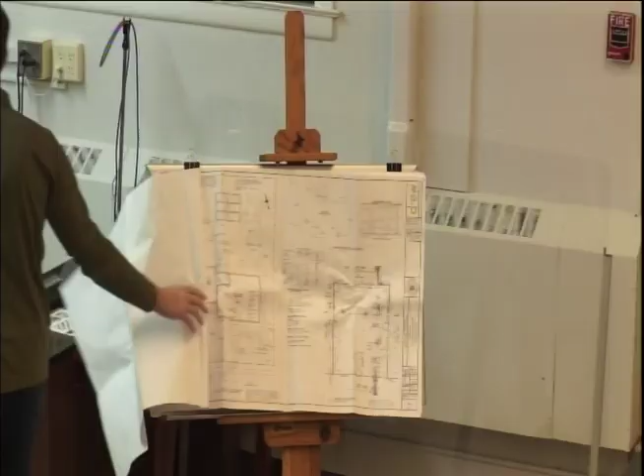Good evening, everybody. Sorry, couldn't be here at the last meeting. My name is Andrew Collingham. I'm the architect for 77 Alcamont. This is my associate here, Alex Glass.

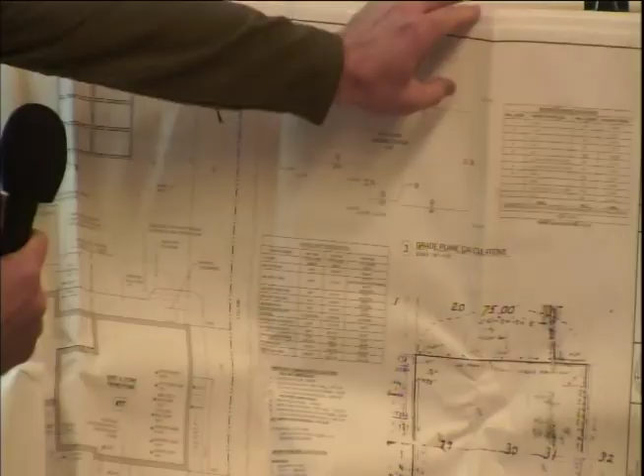So this is a single-family property that's undergoing a substantial renovation and an addition. Currently, the house is in serious disrepair, and so the owner, my client, Anthony Gizzo, and his team are going to be renovating it. So the concept behind the project is to demolish a portion of the house. If you look here at this existing plan, in the basement there's currently a single car garage that we're going to be demolishing, and the addition is going to be situated on the left side of the property, because that's where we have more room. If you see on this existing survey here, the house is closer, favoring the right side property line, so we're going to utilize this current left side yard for the addition.

The addition is comprised of a two-car garage in the basement, above that is going to be a family room, and above the family room is going to be a master suite addition. So in terms of the materials and the aesthetics, the architecture is...

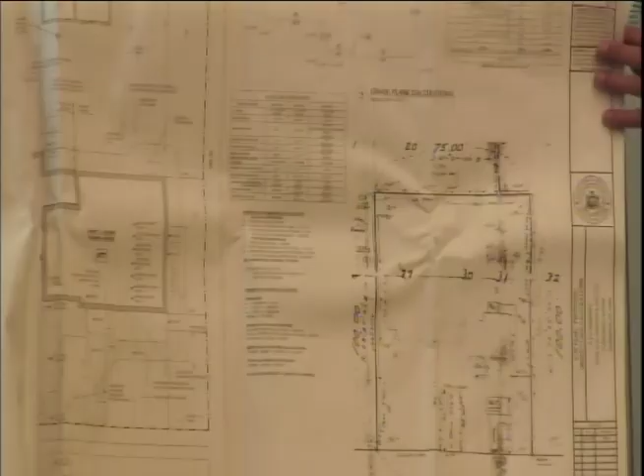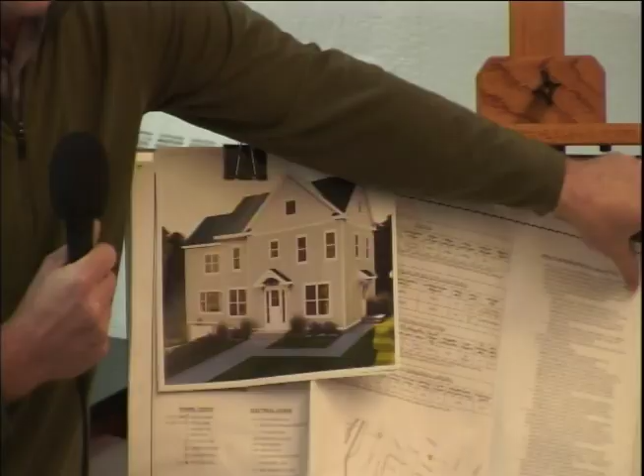More in line with a center hall colonial style, something that's fitting for the neighborhood. The colors are sort of neutral and muted colors that aren't too loud or are more fitting in line with the neighborhood.

So in terms of the materials, we're going with a Hardie product combination, mixing and matching some lap siding on the first and second floor, and then at the attic level we're going to go with a Hardie shake panel siding. Both are fiber cement siding products that are low maintenance, easy to cut, easy to maintain, and they look attractive, just like wood. For the trim, that product is going to be a PVC Azek trim at the corner boards, the skirt board, the frieze boards, and all the soffits and fascias, as well as the window and door casings. Again, low maintenance and a good choice for exterior trim.

The roofing is going to be Timberline HD asphalt architectural shingle in the charcoal color. And then I believe last time we were missing some of the selections for the hardscaping, such as the patios and the retaining wall. The retaining wall is going to be a concrete interlocking block product.

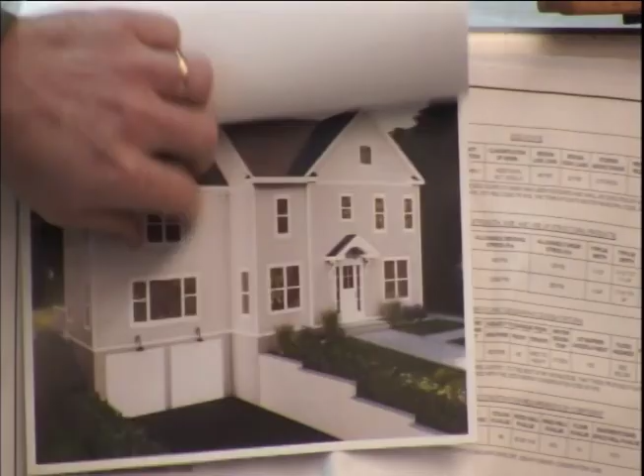Kind of difficult to see here, but there was also a question last time about the grading around the property as it pertains to the heights of the retaining wall. So on the right side of the driveway here, we're going with the 6-foot maximum retaining wall that fits the grade, and it suits the elevation of the garage and the entrance from the driveway. And then on the left side of the driveway, as it pertains to the grade, it's about a 4-foot high retaining wall.

And then both of these walls slope down to about 0 when they get to the street level. So these retaining walls are necessary to play into the topography of the existing grades so that we can maintain access to the garage at the basement level. The current situation is the same concept, but we are shifting the garage over to make up this new addition. So it's the same concept.

The driveway has a slight pitch towards the garage doors, where we have a trench drain in front of the garage doors to catch stormwater. And then on the front yard here, we have a walkway, concrete paver walkway, Unilock product. It's sort of a muted gray color, very neutral. That walkway wraps around to the side yard where there's an entrance into the mudroom at the side here.

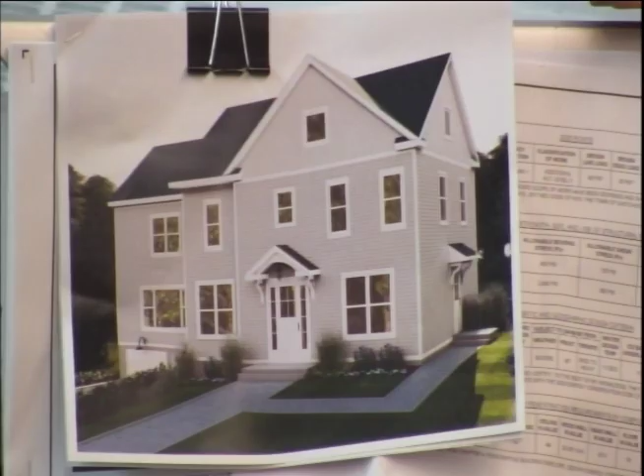One of the comments we received was pertaining to guardrails or railings around the retaining wall and at the front door. Both of those conditions are not a code requirement because there's not a walking surface adjacent to a 30-inch or more drop. So at the front door here, we only have 2 risers, which is roughly 1 foot, so by code, we don't need a guardrail or handrailing because it's less than 4 risers. The same condition exists for the side yard. For the driveway, even though we have a 6-foot retaining wall, there's not a walking surface within 36 inches of that retaining wall, so by code it's not a requirement to have a guardrailing there.

So that was kind of a lot. I don't know if anybody has any specific questions on our amended set.

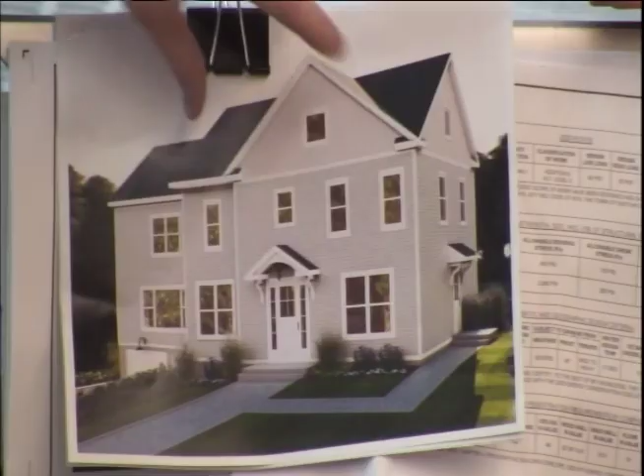The existing home that's existing? Correct, yeah, a portion of it. So, do you have photos of the existing home? We submitted it on the original submission. I don't have any with me. I don't know if you can pull any up on your phone.

Because I know you're saying that the left side is an addition, but what's happening to the right side? I wasn't at the last meeting. Oh, okay, because it looks like the whole house is new to me. Yeah, correct. So we're taking the entire second floor down, the roof, as well as the second floor walls, and then keeping the first floor walls, and then we're just repurposing them, including them in the new design.

So one of the questions we had last time was, I guess, the home on the right side, the existing home, on A3, there was kind of just some confusion regarding the extent of the existing foundation versus the new foundation.

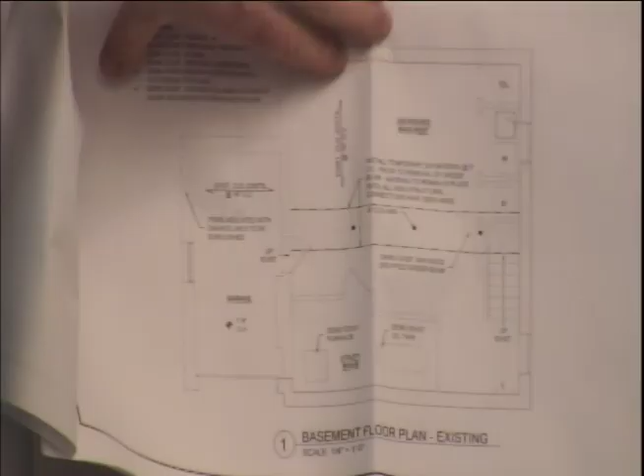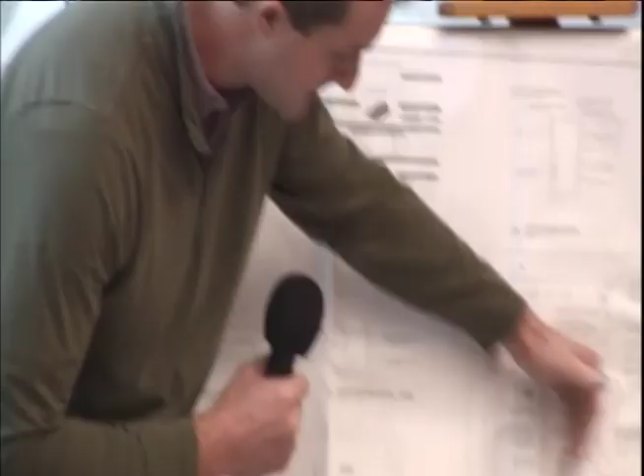Sure, if you look at this existing basement floor plan, you can see that the existing garage is on the left side of the house. So what we are doing is effectively building where this garage is, so that's getting removed. And the new garage is going to go right next to it, 2-car wide. So if you look here on this plan, this dark delineation line shows the difference between existing on this right side and proposed on the left side. Right. So this is the extension here, but this is all new foundation that wraps around here.

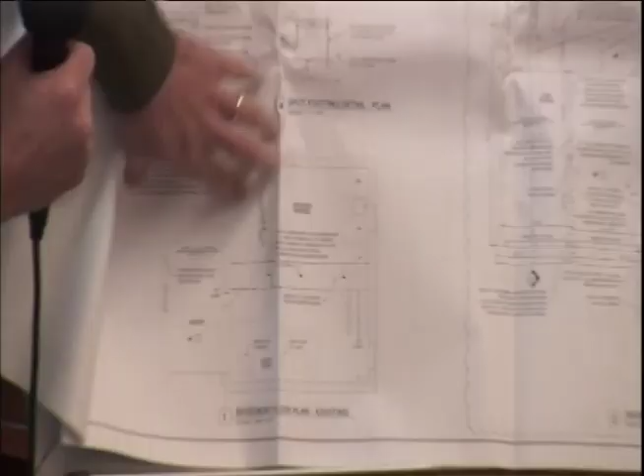All new foundation just on the left side, to the left side of that dark line, correct. So everything on the right side, it's just existing poured concrete foundation wall to remain? Correct. Before, so you're just pinning the new, are you saw cutting it? Well, it starts where the existing garage door is. So the garage door is going to go, obviously, and then this is all going to get removed here. And then, yes, we're going to cut where this dash line starts, which is right about here, and that's going to get removed.

And the existing foundation is poured concrete? Correct. How old is the house? Existing house? I'm not sure of the exact date, probably in the 50s. It looks it, looks older than that. And it's poured concrete? Yep.

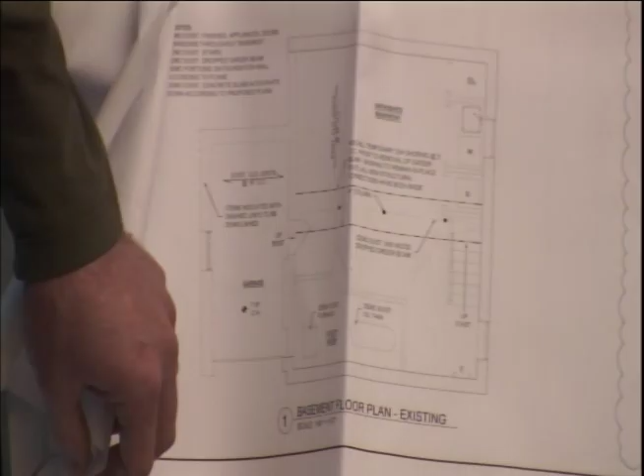So the existing house, yeah, the garage, the existing footprint of the existing house is not getting enlarged, only the new? Yeah, it is getting enlarged. It is getting enlarged? Yeah. So you're contradicting yourself then. Well, no, it's an addition to the project. I know there's an addition to the left. I'm talking about the existing house. You're taking off the second level and building a new level? Correct. Because scale-wise, the house is another 12 feet higher than this house. Correct. So that means it's probably getting deeper as well.

So there's a rear foundation, or no? Say that again? Is there a new foundation behind the existing house? No, it's actually getting smaller behind it. If you go to this first floor plan, you can see.

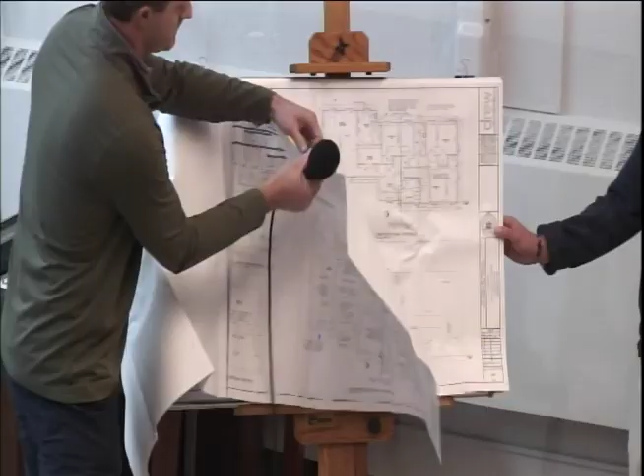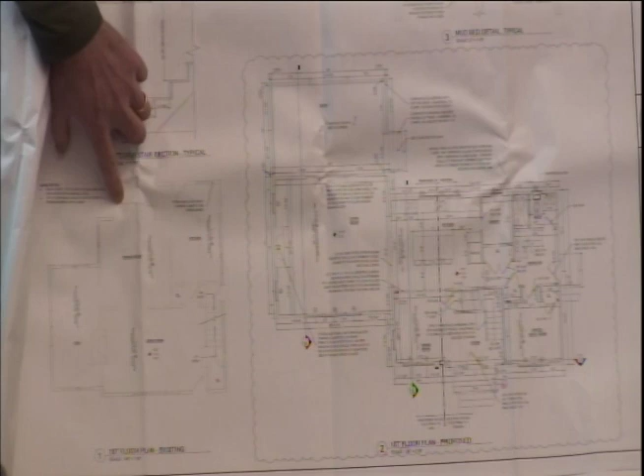So this is the current existing first floor plan. As Anthony had mentioned, this den area on the side, which is above the garage, was an addition at some point. So the existing house is really this square shape here. There's two very shoddy additions in the back here that are not on foundation. They are just cantilevered, sort of hanging in the air, so those have to come down. So effectively, this square right here is the existing house that is being preserved, and this piece here is the addition.

I think what would be helpful is just a rudimentary, almost block diagram that clearly indicates the footprint of the existing home, and maybe the subtraction of those cantilevered portions you're talking about, which are structural elements without a foundation. Then just in cross-hatching indicating the new addition, so it's very clear but in a simplistic form. That's kind of the conundrum we had last time, it was difficult to see, because the garage is being demolished.

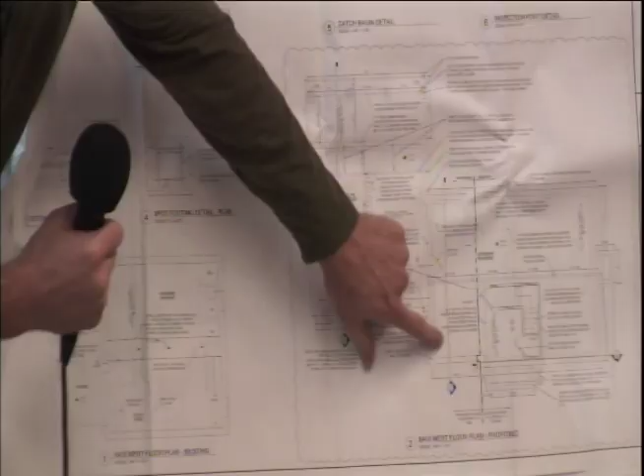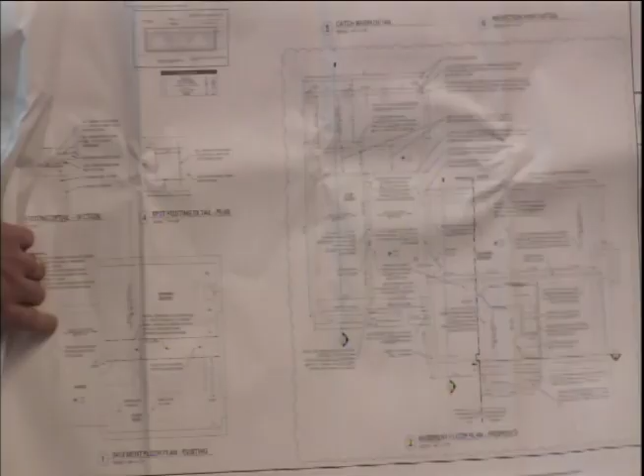Even though this part here we're showing as new, when we're constructing this it will be new. But in terms of existing versus proposed, this section is quote-unquote existing, but it needs to be removed in order to properly construct the new foundations for the new house we're building. So it's new foundations on everything? Not everything - if you look at the existing basement, this garage is existing, but it needs to be completely demolished in order to be conducive with the new project. So this rectangle here that's maybe 10 by 20 is existing in shape, which is right here, but in terms of what we're calling new construction, this needs to be newly constructed.

From a diagrammatic perspective, I understand what you're saying with the overlay and hatching, to understand it, but these are more construction drawings, and how would that work? I'm not saying that, but everything to the right of the hatch line - I'm looking at the old drawing just for reference - you've made some clear additions, i.e. the existing on the left, or the new on the left and the existing on the right. But the foundation to the right of the dotted line...

This one, that's an existing foundation. Correct, this whole area is existing to remain. And I think to my colleague's point, that footprint is remaining, correct. You're not extending it out the back, you're just increasing it in height.

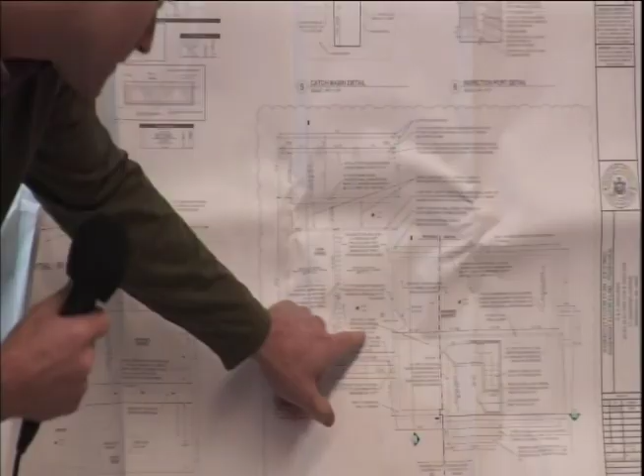Correct. Are you changing the posts and footings supporting the beam in the basement too? Correct, the existing slab, yep. Okay, because the columns in the existing don't match the locations of the columns in the new, so you need to specify that those 3 footings are all brand new also. There's a note on one of them, but it's not clear that the other 2 are also new. Yeah, there's a note here, 2 foot by 2 foot spot footing, but the other 2 would be typical. I think it just needs to be clarified what exactly is new versus what's existing and staying.

Sure. So you said it's going to be HardiePlank, right? HardiePlank, yep, and the windows are new? Correct, yep. What kind of windows, what kind of grills? As you've shown, no grills? Yeah, as shown on here.

I'm just thinking, my personal opinion - the house reads very tall, and I think it needs more detail, like grill work, because it's reading a little flat. Also, even though you don't need a railing at the front door, I think it should have a railing for aesthetics, not for code. Yeah, I don't know, I think it would be a little funny to have a railing with just a 1 foot high platform off the ground.

You said it's 2 steps, right? Yeah, 6 and 6, roughly.

I think if you did some kind of grill work, it'll make the house look a lot nicer, and maybe a horizontal element between the first and second level, which will make it read less tall. Believe me, I would love to make a highly articulated piece of architecture, but there comes a point as a homeowner where you ask, is this project worth endeavoring on all these finer details and expensive elements?

But that's the reason why we're here, as a board. I think there's a happy middle ground that we can come to, and it's also worth keeping in mind what is currently there and how we're improving that underlying existing condition, trying to not only improve this particular house but also the whole neighborhood. How does that current structure weigh on the surrounding neighborhood currently?

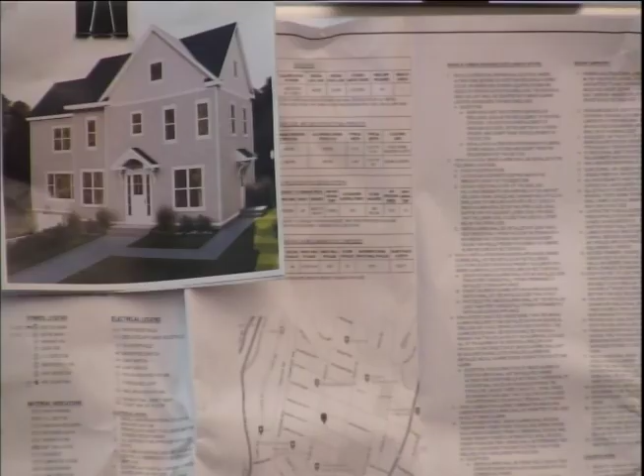The windows on the first floor - how tall are those windows? 6 foot? I'm not sure off the top of my head. 5'6".

So how tall are the second floor windows then? They look out of scale - they look much bigger than the second floor windows. 4'9" on the second floor.

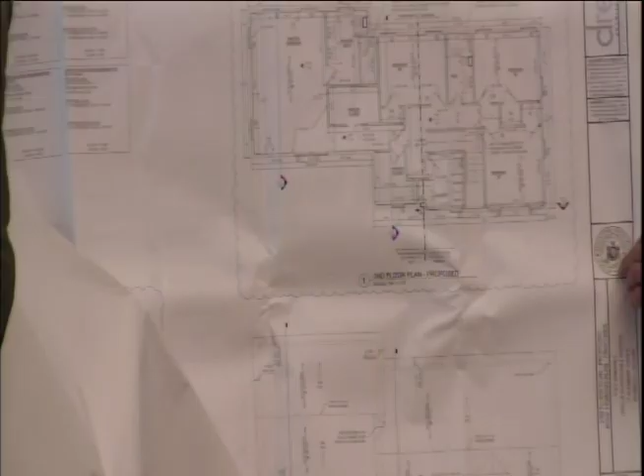Sylvia, if there was some sort of a dividing horizontal line, would it come into the portico in a weird place, or? Well, it's the architect's decision where he wants to lay it. He probably would want to line it up to the bottom of the portico, so it lines up with that line. Okay, but would that be too close to the windows, or no?

The lower windows? Again, it depends on where the head of the windows are, and also the portico could be raised. I'm just suggesting, because just by drawing that horizontal line, look at the house - see how it reads? It reads very tall.

Noel, we had a list from the last meeting, and how much of that list have we discussed? So let's just go through the list. It said to provide accurate grading, particularly near the driveway.

Provide an elevation of the retaining wall. Clarify the proposed finishes, specifically whether the scallop siding is proposed. Provide the specifications for the railing at the top of the wall and the stairway - we've discussed that to some extent. Clarify the walkway and steps on the side of the addition.

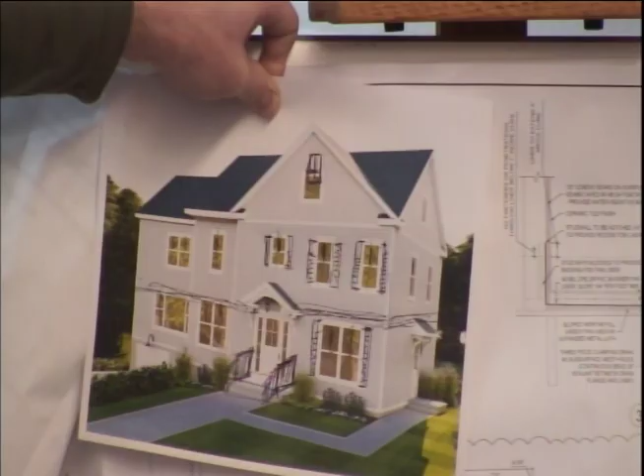Is that the safest solution, as the design professional, is that something you'd start out with - just having the top of that retaining wall flush with the grade? It looks nice in the rendering, and you've stated that because it's not adjacent to a walkway, you don't need a railing on that wall. But again, the rendering, it's not going to look like this right out of the box.

You know, the renderings and the plantings have to grow. And I just think from a safety standpoint, this wall would feel safer if it projected above the grade. You're saying the grass is flush to the top of the wall?

Well, it's not the grass, it's the mulch bed, the planting bed there. But to the corners, right? Yeah, the stone would be proud of the mulch bed because you don't want runoff, dirt and soil going over the wall, so there's gonna be some barrier there - it does project above it.

When I say flush, I mean visually flush, but there's gonna be some proudness of the wall over the mulch bed. I don't think it should extend more than 2 or 3 inches, but there's some negotiation between the slope of the soil and the stepping of the stone. So it varies, but it shouldn't be blocking a person from falling over - that's not the purpose of this wall.

I understand that, but as long as it's not flush - for maintenance and runoff, but I also think from a safety standpoint it shouldn't be flush, because it's not gonna be grown in right from day one. I don't know, are these homeowners your clients, is this where they're gonna live, or is this a spec house?

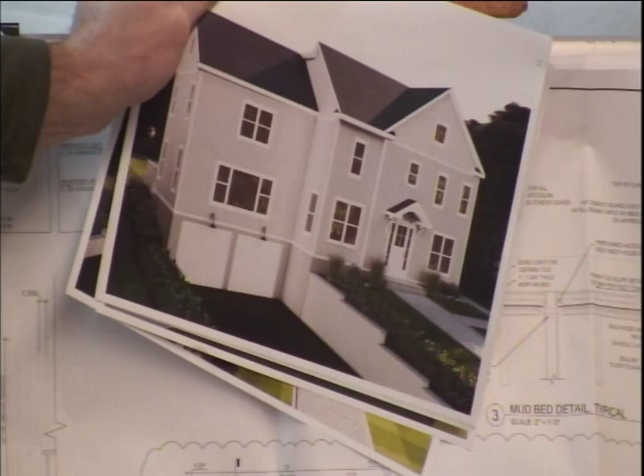Yeah, it's an investment property. Okay, so there's a possibility there's gonna be young kids there playing in the front yard. I think you just need a degree of buffer, that's why we added the plantings there - a 3-foot buffer, that's why you added them in the picture. Yeah, I would say definitely put some plants.

Is this AC in the back here?

I think a railing there would look unattractive because you have a 4 or 5-foot wall plus a 3-foot railing. I'm just asking if you would increase the height of the wall, so it's like a curb - not 2 inches, it could be 6 inches, all you're doing is increasing the wall by 6 inches so that it's got some kind of a barrier.

It's more of a visual thing - you're just not going to kick a ball right off the side, or run over. Fine, okay, I got you. Essentially a reveal, like a reveal on a curb. You're just creating a curb at the top of the wall from where the grade runs in.

Is the public hearing still open on this? I think it is, yes. Okay, so is there anyone here that would like to question or comment on this application? No? Okay, so then close the public hearing.

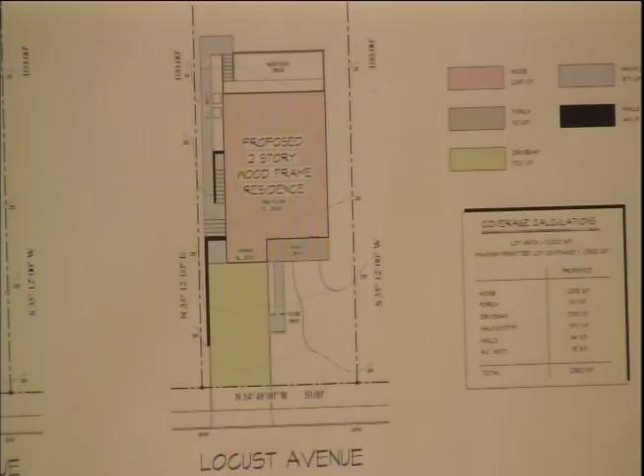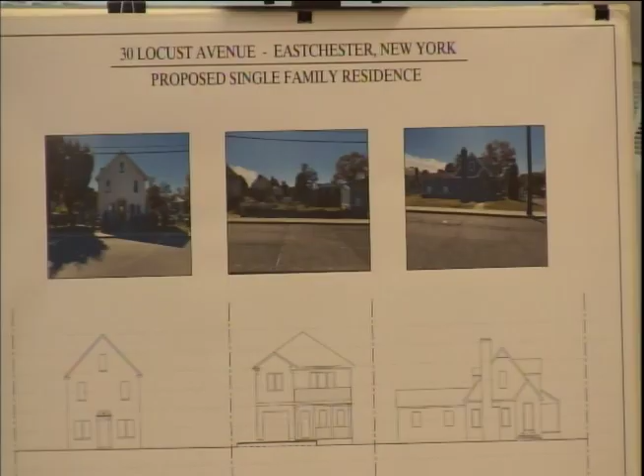This is a street facade drawing showing the relationship to the neighboring homes. So this is the proposed home on the vacant lot - a two-story residence. To the left is an existing two-story residence with a detached garage further back in the rear yard. And on the right is a 1.5-story residence, showing the relationship. These two houses will be approximately the same height, and the one on the corner is slightly lower. Locust Avenue slopes down from left to right - it's a very gradual, slight slope, nothing too major. And then the subject property actually drops 4 feet in height from the street to the rear property line.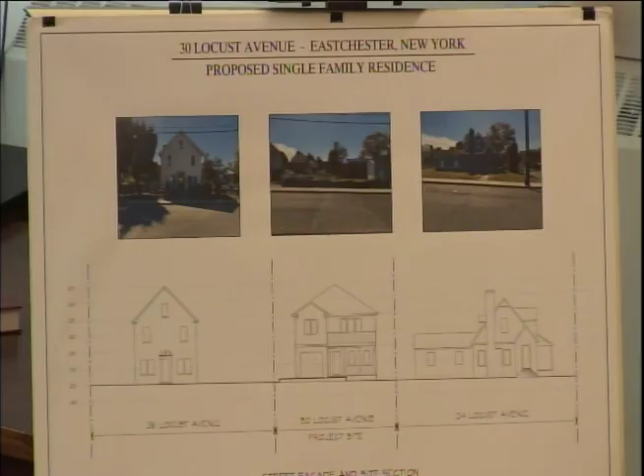Here's the exterior elevations. On the front, we have the garage overhead door at the left, and then at the right, we're going to have porches both on the first floor and on the second floor. On the sides, we have the second floor cantilevering into the rear yard in order to create a little more space for the depth of the wood deck. So the wood deck is at its maximum setback here - we set the first floor in a little bit just to get that 10 feet of deck space. And then at the rear, we have the wood deck with the metal railing and some lattice below.

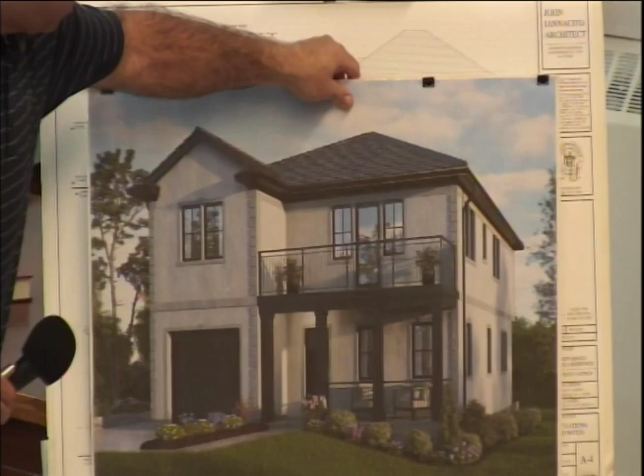This is the rendering showing the finished materials. The wall surfaces are going to be a stucco in a light gray finish. The quoins on the corners, the casings around the windows, and the banding around the building are all going to be a stucco also, but in a slightly darker shade of gray. The windows will be vinyl clad in a black finish.

The roof surfaces will be a concrete tile in a dark gray finish. The trim boards and the columns will be AZEK painted black. The railings are going to be metal in a black finish. The gutters and leaders will be aluminum in a black finish. The front entrance door and the overhead door will be fiberglass in a black finish.

And I have samples of all the materials that I can pass around.

And then this is the landscape plan, which was produced by Dan Sherman. We have a couple of new trees, one at the right corner of the property and one adjacent to the deck to provide some screening to the neighbor. We also have a row of plantings along the driveway between the driveway and the neighboring property, a row of plantings between the driveway and walkway, plantings along the foundation of the front porch, and rows of arborvitae around the rear property lines to provide screening to the neighbors' properties.

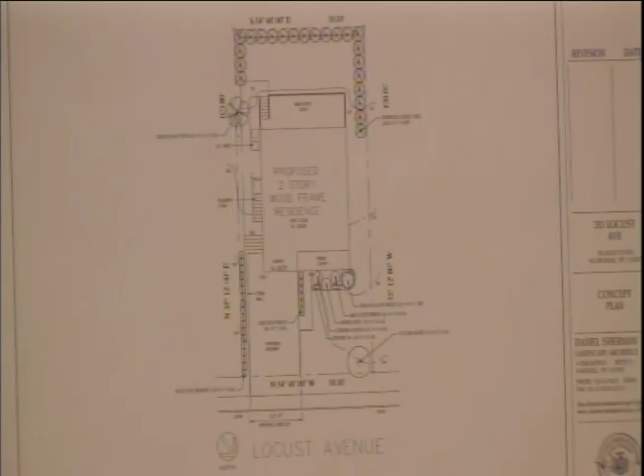The lights are shown on the elevation, and I did submit a cut sheet of the lighting fixture, and those will be similar at every location. And that's about it. Thank you for your time, and I'm happy to answer any questions.

That's the roof. Is this 2 lots in one? So they're 2 25-foot lots. For some reason, they show up on the tax map as two separate lots. They're actually subdivided lots and they're going to need to be merged.

Oh, we have to merge them? Yeah, because they're lots shown on a filed map, not just tax lots. Okay, we could talk about that tomorrow, that's not really for this board. So is that why it's got like the double barrel, we had to put two numbers, 30 and 32? Yeah, because on the tax map it comes up as two separate lots.

Right, okay, excuse me, this is the color as well, right? That's the color. And that's the stucco of the wall surfaces, and then the quoins and the trim are gonna be slightly darker than that. This is AZEK, everyone knows AZEK.

Metal railing, and then this will be the overhead doors, but in black, and no glass on it. No glass? On the garage? I want glass, you want glass on the garage? Yeah, I think it would look nicer. Are they gonna be black? The door's gonna be black?

I have a, I guess I'm gonna start as usual. Sure. All right, so this is being built for someone, or it's being sold?

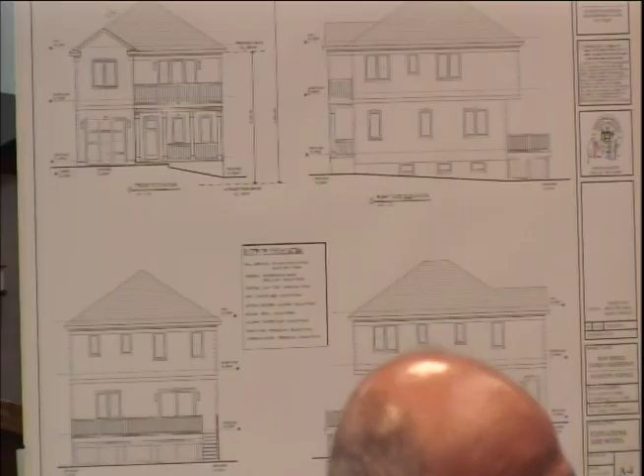Side lights - I think adding side lights to the front door would also give it more of a front door entrance, entryway look. Especially since it's set a little bit back, you kind of need to highlight that it's the front door.

Okay, all great suggestions, but I don't think you need the quoins. It'll make it more bling. No, you don't.

Also, because of the gray color - I mean, I love black windows, I like black - but it's lacking warmth for this style. It's not going, I would say gray is more of a modern look, and the only thing is we're trying to play off that roof.

The whole thing started with the roof. I mean, unless we go with something a little different on it. You could go with this color, you could go taupe, not gray, like an almost creamy gray, cream and gray mixed.

No, we're not talking about the tile. Talking about just the paint of the stucco, the color of the stucco, yeah.

Something a little bit warmer. Okay, yeah, that's easy. Well, everybody loves black, white, and gray houses still. Yeah, it's what's in, I don't know why.

It works for certain styles, like even for colonials, black shutters look good. But for the modern farmhouse kind of look, black and white works too. Yeah, there's something about the dark pillars and everything of the porch that felt kind of heavy at the bottom, and dark.

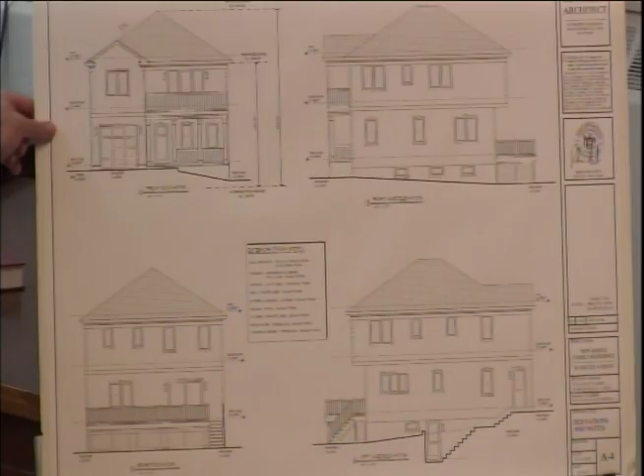And I guess the intention is if you have a balcony there, people are gonna go out on it? I mean, initially, I wanted a roof on that, a metal black roof going across, but you wanted a porch, right, on the front?

I just think it doesn't fit. I agree. So the roof, then, you think the architect, the roof would look better, but it's also not - I have to meet my client's needs. I got you. Well, that's why you're good at your job, John.

But it's almost Mediterranean, so pushing it a little bit more makes it Mediterranean. Pushing it further, then we could actually use the tile on there. I don't know if having a roof here and a roof here might be a bit much, but...

I can take a look. I'm not saying you gotta nix the railing and the whole porch. But I just think that this sort of thing - is it actually gonna be used a lot? It's not even a master bedroom.

I mean, I probably would never sit up there. It's not the master either, it's for the children. Yeah, well, it's a good way in the back for teenagers to escape, yeah, exactly.

Oh, great. But I certainly think the two windows and the door - maybe I can do a double French door, so if it'll fit. But again, it's not the master, so it's like even...

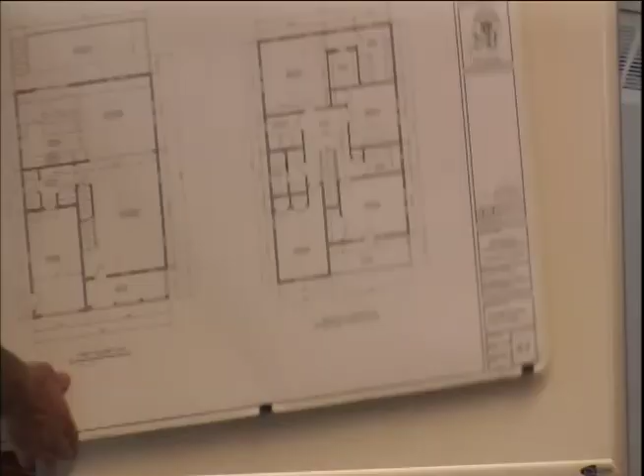Like why, and how do you, for privacy, do you put blinds on that? Just think - yeah, so that's why we couldn't do the three windows.

I think you need to play with it a little bit. I'll talk to my client about it, and if you want - he's just looking to get it built and finish it, move on to the next one.

And we want to make it as attractive as possible, so it sells quickly. We do, absolutely. Yeah, don't we all? Okay.

All right, so is this one open to the public? So I'd like to make a motion to open application 24-41, which is the address 30-32 Locust Avenue, to the public hearing.

Does anyone here wish to comment or question regarding this? If so, please come to the mic and introduce yourself and your address.

Good evening, my name is Marcello Solano. I live at 24 Locust Avenue, the adjacent house to the right. My biggest concern is 24 Locust Avenue has a high water table. And since it was originally one lot before it was subdivided, I believe all my drainage pipe goes into a dry well located on property 30 and 32.

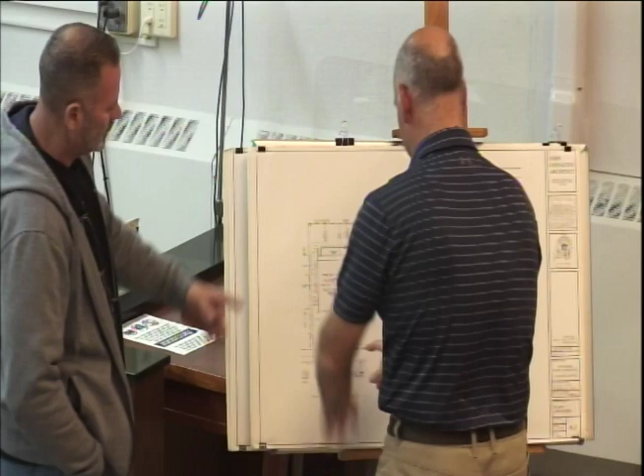Is it for leader drains, or footing drains? No, where's the one with the three pictures? It's gonna be over here in the back corner. In the back corner here? Yeah, where's the one with the three houses?

There's the streetscape elevations. That's really not a plan, you really can't get off of this. Yeah, but it's gonna be back here in the corner. Yeah, so this is the back part, by this white picket fence. Towards the back, you're gonna see it underneath.

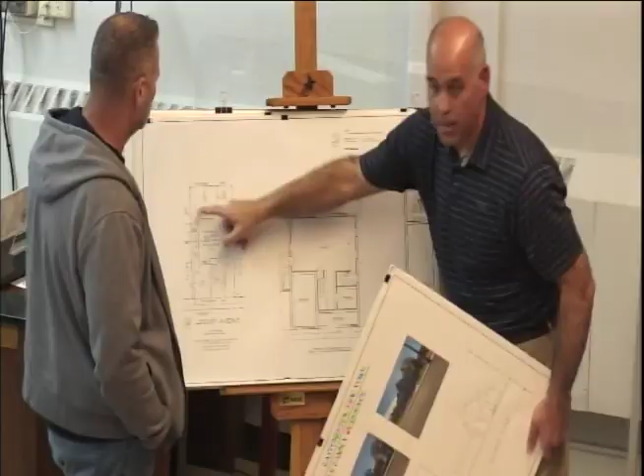Oh, he cleared that out, somewhere back here. I'm sorry, but I don't think the mic is picking you guys up. Gary, is the sound being picked up?

Perhaps the first thing to do is to review the records of the subdivision that created your lot. That should be our first step. You also have a survey and a site plan here.

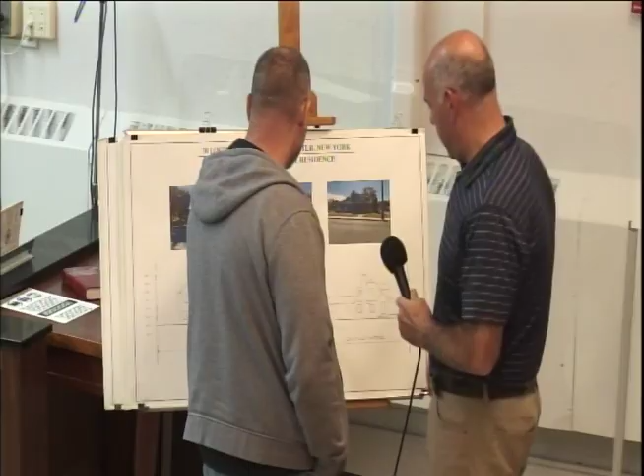Should be handled in the building department privately, not at the architectural review. You already have a drop here.

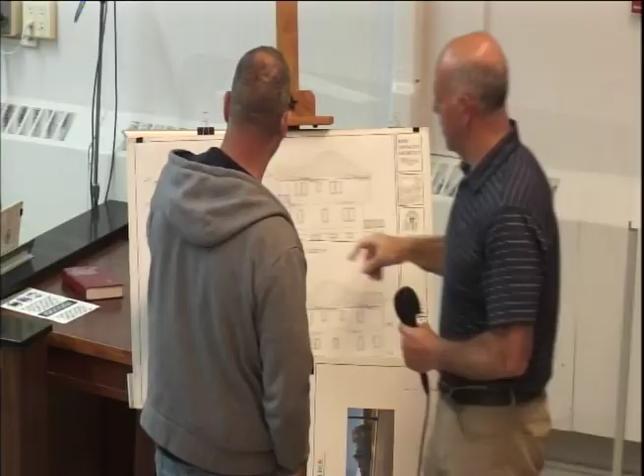Yeah, so now with heavy rain, the water's gonna flow this way. Well, this is all grass here, but it's a hill, and this driveway's going out towards the street. I know, but with heavy rain, this is a high water table on your side.

In general, when new construction is done, the amount of drainage, French drains and this drain and that is so much more now than it ever was. So putting new construction on that property will help the properties all around it.

I understand that, but this is the thing. See, my house is this one. The drainage over here, this was one parcel, so all my leaders are on the ground, which I believe go to this here, because when it rains heavily this backyard floods. It's all water over here, near where the dry well is.

My backyard doesn't flood. I need the mic. All my leaders that are in the ground go to the dry well that's here.

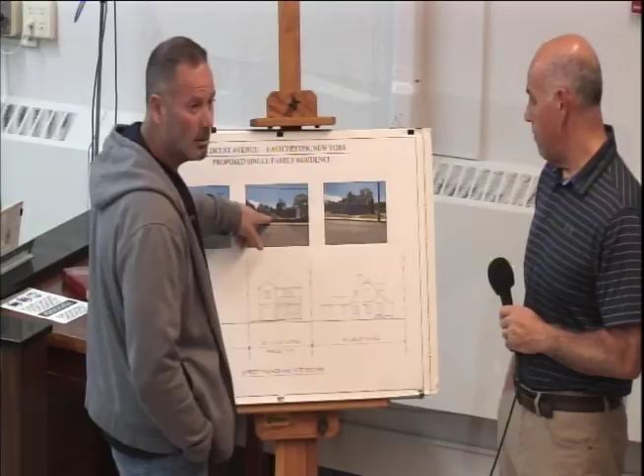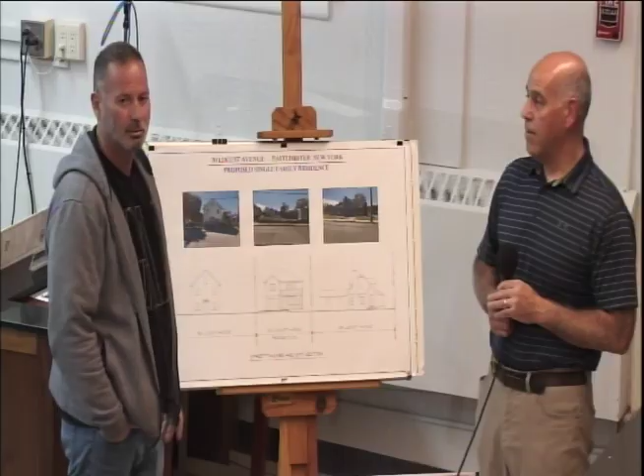This application is at the architectural review board, so when this goes to the planning board, that's a different process. This is only the first step, the first meeting. They haven't gone to the planning board yet.

But when they get to the planning board, they will have a more detailed stormwater management plan, which might provide some of the information you're asking about, as you did with the previous guy.

It will be there. It's all minuted, it's getting recorded, so whatever you're saying is getting recorded. That's part of the planning board process.

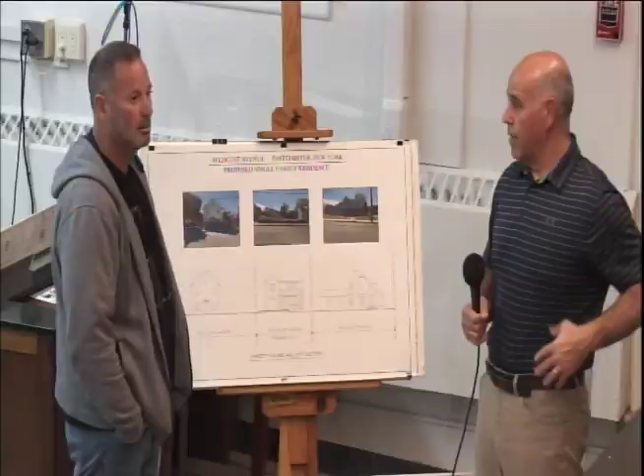Like I said, I'm not opposed to it. No, I got you, but as a homeowner, it only is gonna help my house and my value, so I'm not opposed, but as a homeowner you have a responsibility to make sure you protect your corner, right?

And this is your new neighbor, right? Whatever sort of agreement he had with the same guy who sold you your house and sold this guy this lot, is it the same entity? Did you both buy your properties from the same person?

All right, so as part of any sort of sale agreement, especially if you're selling a piece of property, it's got to be surveyed by a licensed surveyor.

A document has to be prepared by a surveyor or engineer, signed and sealed, and any pertinent information should be included. Another reason I'm here today is because I lost my attorney, who was taking care of this, and when they were to go build he was going to help me with this situation. Unfortunately, you know. You may want to find somebody who can help you go through your title material or your subdivision plat to understand what kind of easements came along with the title.

He was my lawyer, my realtor lawyer, so he knew, and he said don't worry about it, because once they build, Eastchester has got to get involved. They have to, if the drainage does go there.

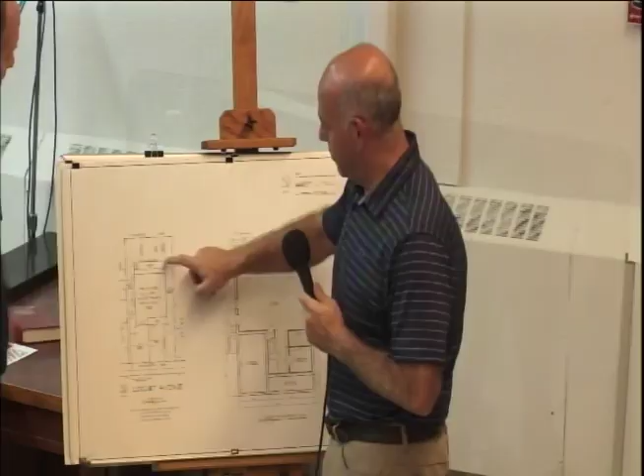So this is the lot. I'm assuming you're back here? Yes, I'm 79 Bell, right back here. So from the edge of the deck to the property line, we have 19 feet. And from the rear face of the house to the property line, we have 25 feet.

The only thing that's going to have railings on it in the back is the wood deck. There are no balconies, no porches on the rear of the property. How high is the wood deck?

It'd be nice to see a perspective from my house, because there's also a brick house, the Bosco house on Gaylord, and then my house. You've shown houses side by side, but you don't have a perspective on that alleyway, because you have Acasella right there too. This whole area is getting really busy - I almost moved over this.

The deck is about 5 feet above the grade. So it's 5 feet above grade, meaning somebody standing up is at 11 feet, just looking into my property.

And then we have a landscape plan where we're proposing to plant new trees around the entire perimeter of the backyard. What kind of trees? How tall? Arborvitae? It'll make a big giant green wall - green giants, yeah.

I don't know what size he made them here. They need to be like 10 to 12 feet. I think it said on the actual plan itself - 7 to 8 feet. It says emerald green arborvitae, 22 of them at 7 foot to 8 feet high, on the corner, the ones on the plan. So they'll go in at 7 to 8 feet and they grow fast, about a foot or two a year.

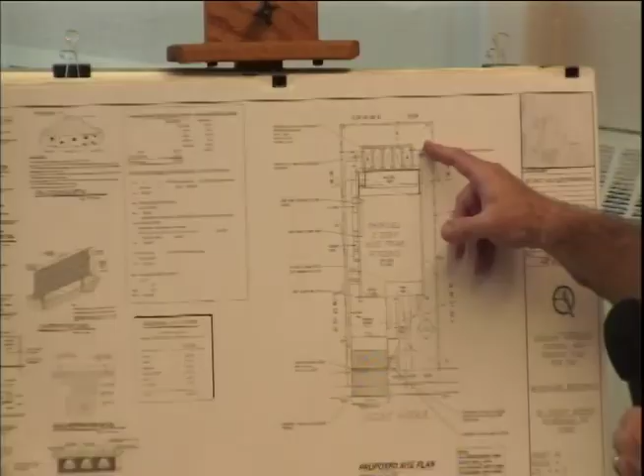This is the drainage plan the engineer put together. He put the dry wells at the rear, but if it's true that this whole backyard floods, that may not be a good place for them - we may have to move it to the front yard. I'm an engineer and I do some of the drainage stuff - that catch basin looks kind of light for that, seems light on top of it, for a new house.

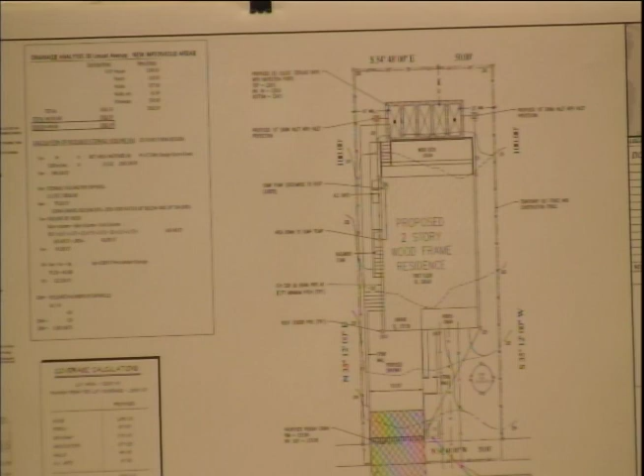And then a 100-year flood - you gotta design for that, but it's actually not a 100-year flood anymore, it happens every year. It used to be Ida and Irene, but now it can just be an afternoon in July. I've got all the videos, I've saved every single one of them, because this has been such an issue going back to 2017.

I bought the house from the Chavez family in 2017, had already requested a retaining wall in the field. The catch basin is out front on Bell Road, and the town should probably consider two more catch basins to prevent that water from coming into my backyard through my neighbor's driveway, then flowing right into your property. All I have to do is take my fence down and the water will continue right through to your new property, and I'm not responsible for pumping down the town's water.

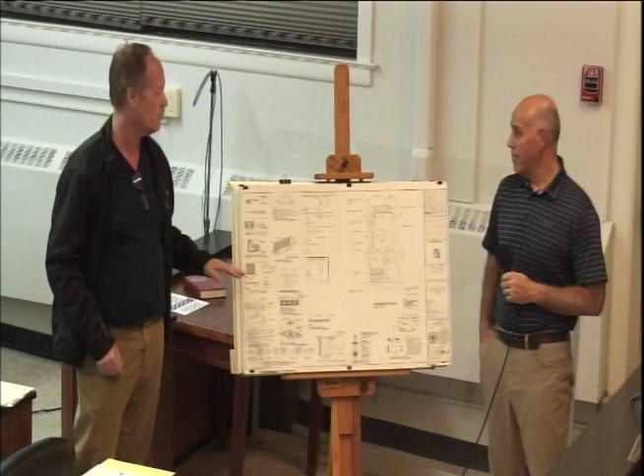The stormwater is a little far afield of this board's authority, so I think we probably want to bring the conversation back just to the architecture. Well, I'll attend the next planning meeting then. Great, thank you. Thank you.

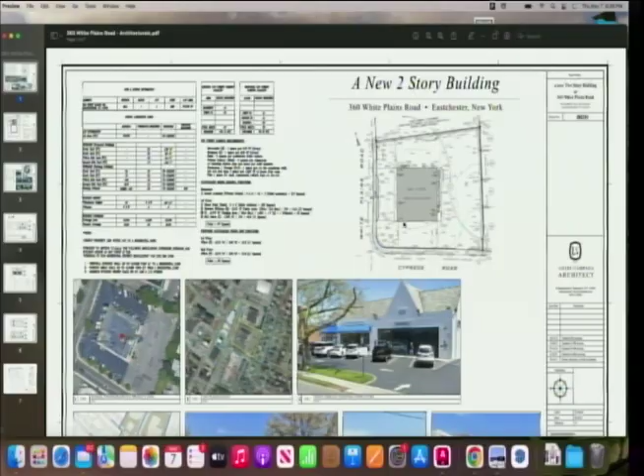I'm just going to open up the architectural drawings. Located on the intersection between White Plains Road and Cypress. Here's some information documenting the existing conditions. Take note here in this aerial photograph. This is the site, or the portion of the site, which is proposed to be developed with a 2-story office building.

Here's a site plan. North is oriented to the left of the sheet. The hatched area here indicates the new two-story building. You can see these arrows, which would be painted on the surface of the parking lot—we're actually maintaining the existing traffic flow as it stands today. And if you recall from that previous sheet, the underutilized parking lot is exactly where we're locating this structure.

We did have to get 2 variances, one of which was for an existing condition for the proximity of the parking lot to the neighboring residential zone. There are more restrictive regulations applied to these lots because of the proximity—they're within 150 feet of a residential zone. The building meets all the zoning bulk and area requirements. And we did also get a variance for a reduction of 1 parking spot, so we have 88 parking spots as opposed to 89.

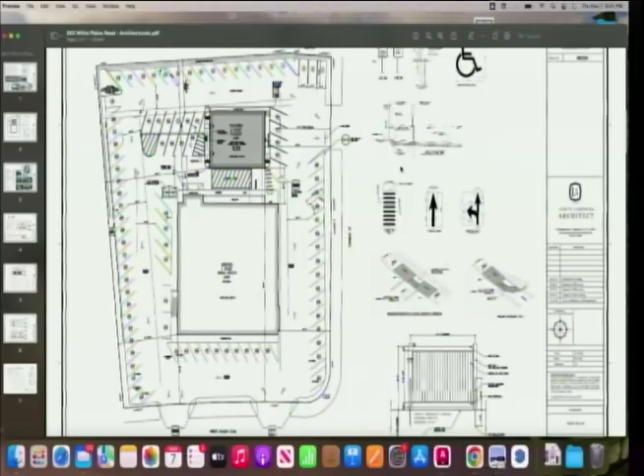In between the new 2-story building and the existing one there would be traffic flow and also a loading zone. Here, at the northeastern corner of the building, we would have a garbage enclosure, vinyl garbage enclosure—I have some details you'll see in a bit. Along the eastern side of the property is an existing retaining wall, varying in height, but 42 inches approximately at the highest elevation, and on top of that we're implementing a new white vinyl privacy fence, detailed here at the bottom corner of the page.

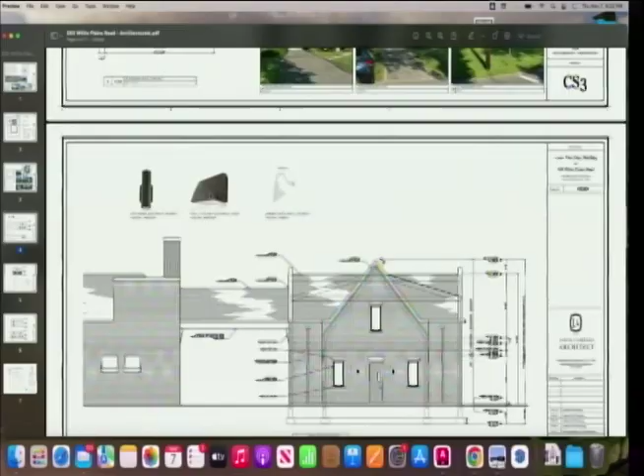This is the garbage enclosure, again with the same detailing as the privacy fence along the perimeter. We worked diligently and closely with the planning board over a number of meetings with the intention of developing a building that not only speaks to the existing building but respects the residential scale of the homes next door.

Down at the bottom of the page is a streetscape of this property. You can see that to the left is the existing side building. Here's the ATM, which everyone's familiar with. And here's the new building—you can see we're in scale and keeping with the proportions of the existing.

We're connecting that with the breezeway, and there's a reason for that. We're proposing to put the utilities, the AC condensers, on top of the existing building, since our building has sloping roofs, and we're going to go through that breezeway into the new building and down to the mechanicals. What's the clearance? 14—I have it here, hold on.

The clearance is 14.6, purposely for emergency vehicles. But what about delivery vehicles? 14 feet is the standard height for these elements. Because some of those things are huge, and that's where they'll hit.

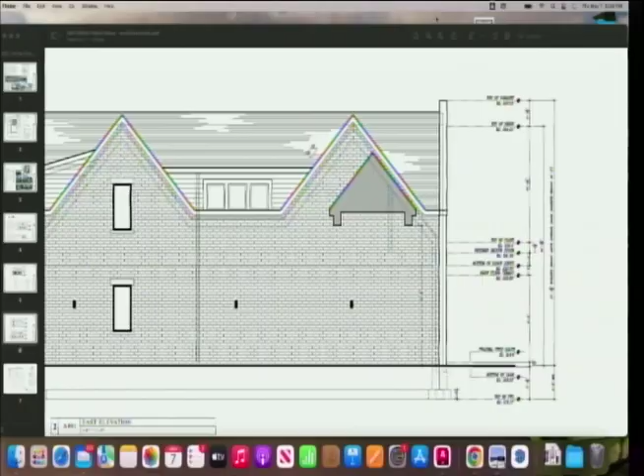So can you go to the elevation? Instead of that, why don't I just bring it to the renderings, because you can see it better there.

That raised part behind is where all the HVAC stuff is going to go? That's existing. So it's going to be concealed from the residential area. Is it just VRF, running refrigerant lines through that? Yeah, just a refrigerant line, so that's nothing. Everything else is going to be electric and fed below ground from the existing building's mechanical and services.

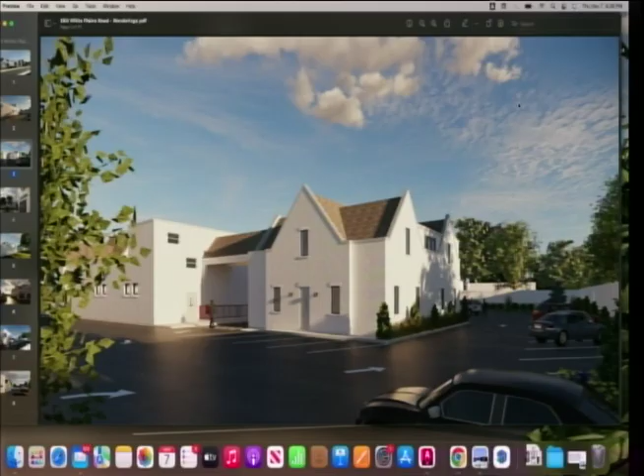Here it is. You can see along the side here, we're also incorporating those parapet gables to not only respect the existing architecture, but also read as more of a residential shape to the neighbors.

This is the northern elevation facing Walgreens. We're going to be using the existing brick, matching the existing gooseneck lighting fixtures, and also signage for the businesses that would be there. The eastern property line is beyond where you see the car parked and the plantings along the retaining wall.

And I'll show you, this is from the neighboring lot. So it looks as if you're looking at a house.

This is the view from the northern corner, looking south into the parking lot — not Stop and Shop, sorry. Country Market, the nail salon, Country Market. Yeah, Country Market's the OG.

And then this is looking to the west from the neighboring property, peeking over the fence to the back portion of the lot. Again, from the front.

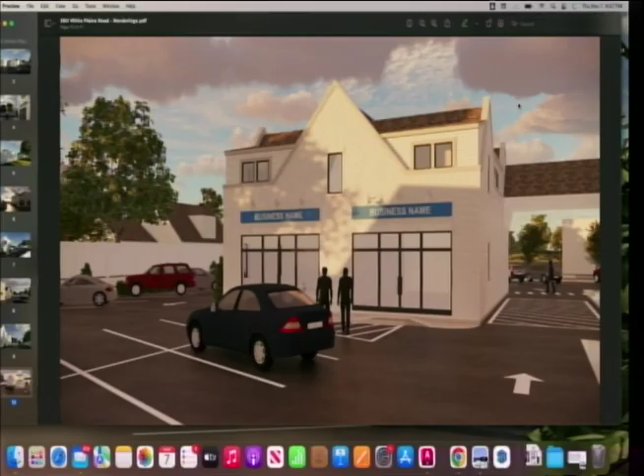Okay, so these two businesses, the first floors, would have higher rent. So there's 4 office spaces — 2 on the first and 2 on the second. The stairs in the back of the building are accessible from these 2 offices and also the door towards the Cypress elevation.

And this is the back corner of the parking lot. But retail is permitted? Retail is permitted, but if the owner wanted to entertain that, my understanding is we'd have to go back for site plan review and potentially area variances because the parking load will increase — since we require more parking spaces per square foot for retail than we do for office. Yeah, that's what the process would end up being.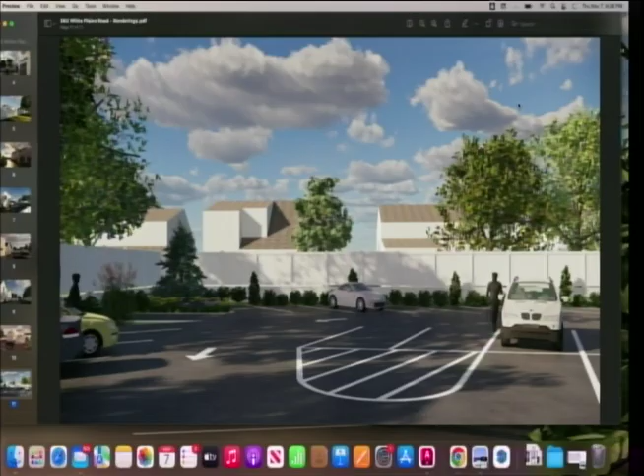And this is not going to be residential? Oh, no, no, no, no, no. Can't be. Just want that on the record.

But is that, and again, I'm not sure you're in a position to answer that, right? Is it a hypothetical that is potentially going to be explored? I can't say that, but there certainly could be the event where someone approaches the owner with the idea, and the owner would know he would have to do this. That idea's kind of been pitched. Do you mean for retail or for residential?

No, for retail. The reason why we changed is quite frankly, there's no way this building could market itself and have frontage where people would see it, other than as a lawyer's office, an architect's office, something like that.

But if you're looking to do a nail salon, there's too many of those. Well, there's already one in the front building, a big one. I'm sure there's always room for another one. I think there are, and the one not in the building next door, in Eastchester. But every third store is different, I know, listen, this is not—

But I think it's a good question to ask. Yeah, actually, retail was originally proposed. The building was much larger, and retail was originally proposed, but when it was downscaled and when the front moved from Cypress to the parking lot essentially, the retail element was removed.

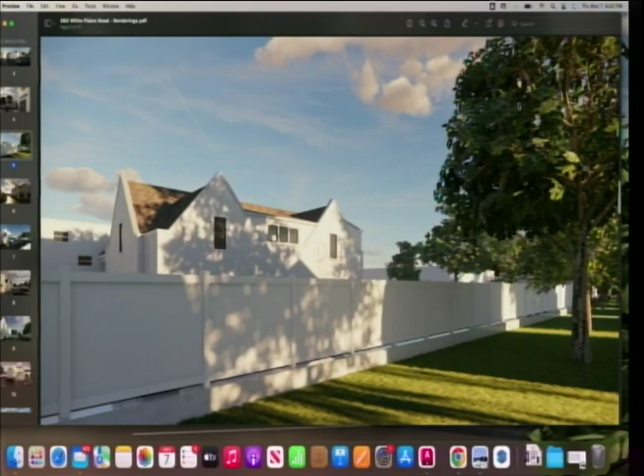I would safely say that it's gonna come back in front of this board. And again, it's not your responsibility. I personally think, the way you've designed this, it's very much in keeping with the surrounding area. It looks nice to me.

You've gone to several meetings regarding this plan, right? Is it on the agenda? So I'm saying it was like 8 meetings for them. Yeah, he went several times for, I guess, planning or zoning, or which one was it? Zoning 3 times and planning 5 times.

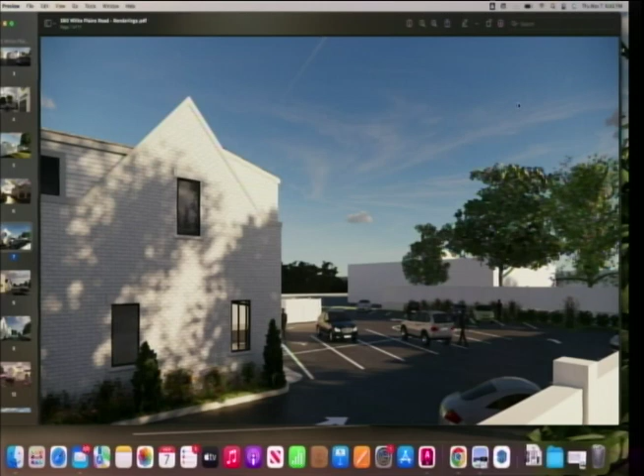I doubt they're gonna, after all that, give you retail, right? No, that's not our intent. I mean, a business—no, I understand, but that.

You're the business architect. Could I understand that business better? It could certainly have a storefront. Retail's not even proposed right now. We can't assume that they're going to use it for retail - it could be an insurance office or an architect's office. Now I get it - what this is doing is it's actually making the space more appealing for a business.

Who maybe wants a bit of a storefront, but is not in the middle of everything. So it certainly enhances the use of the property. Like I said, it respects the scale and the architectural vernacular of the existing building, along with being part of a procession into a residential area without having to look at an empty parking lot.

And again, not to go down this rabbit hole, but is the client the property owner for that entire parcel? That's correct - Chase Bank, yes, the paint store, yes, the Jujitsu, the yoga shop, the old building, Blockbuster Video, if anybody ever remembers that.

I was employee of the month. You were dating yourself there, three times. Or it used to be hit or miss, a clothing store. Yes, I remember - anyway, Blockbuster Video.

Back to the aesthetics of it - the front building, the existing building, is that a slate roof? That's correct, this is going to be slate to match. Thank you very much. The brick, the aluminum coping that's on top of the parapet gable, the soldier course lintels that are over the openings, and also the rowlock brick sills at the windows.

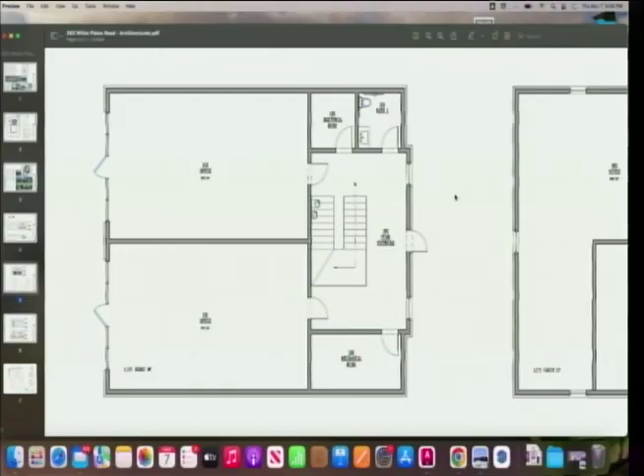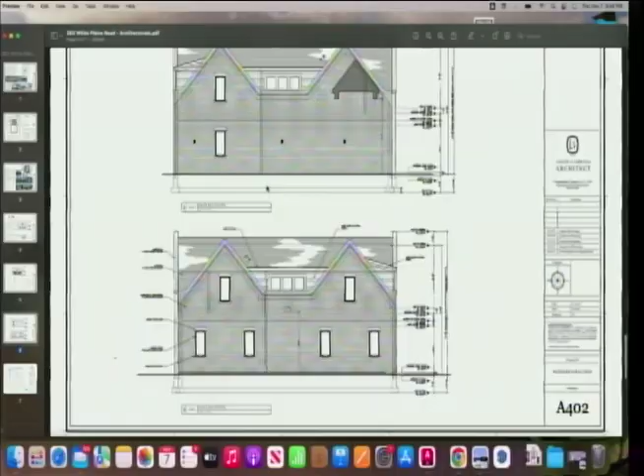So, do we need to open the public hearing yet? Yes. So, I would like to open - could I just add one more comment?

Oh, sure - on the side that faces Cypress, I know that that's not the main front of the building, but I do know that, being someone that drives down that street all the time, that is very visible from the street. My one comment on that side is just that the door you're showing there is very back-door looking, industrial, and it might be nicer if it was something a little bit more attractive than just a plain steel door with a single window. And could those windows be a little bit bigger, like wider, not taller, but wider?

Could you go to that? I don't know if wider does anything to it - I think proportionally they're right the way they are. I think especially if there are clients that would be coming in and out of this building and going to the second floor office spaces, they may end up using that door a lot. So it might be nicer for the future tenants of the building to have a nicer entryway on that side.

I think that's only a fire exit, really. It could be used as an entrance, but it's also part of the stairwell. So people in the upstairs offices have to go to that stairwell, right? Yeah, so if anybody's coming in - the stairwell's on the other side? It's a fire-rated door, exactly.

It's a hollow metal flush panel, not a storefront by any means. They're just trying to - we don't want to call it or make it look as if it's a main entrance. That's the thing, okay.

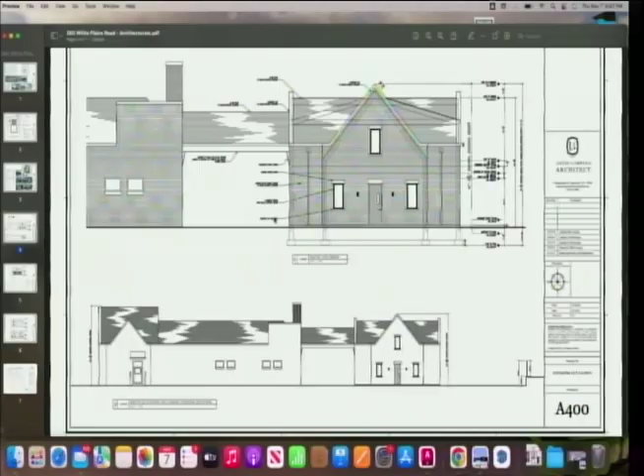The upstairs offices have to go through that door to get in, because there's no front entrance that accesses the stairs upstairs. That's kind of weird.

So I'm just saying, if you're a business owner and you had one of the upstairs offices and you have clients coming and going, it might be nice to have a slightly nicer entrance there. Put a canopy over the door.

I think you want to try not to make it look like a frontage on Cypress. Yeah, that's prohibited under the zoning law. I think it's simple, but it's always a bookend to the existing building there.

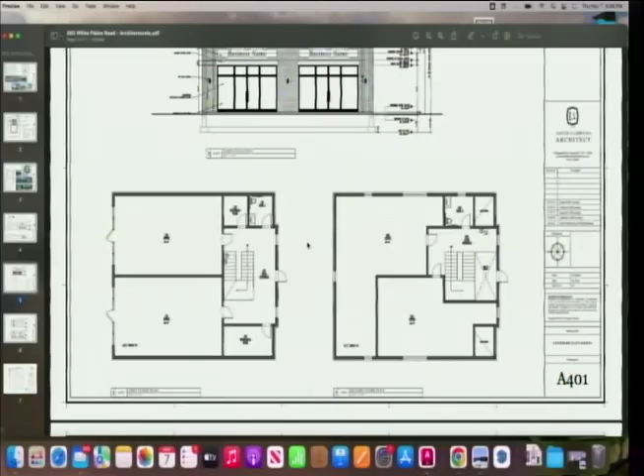Listen, I think the fact that it's gray on the elevation, you may paint it the same color as the white gable, the door, or the gray aluminum coping that's on the parapet.

I guess if that's sort of the main entryway to the upstairs tenants, is there signage, is there door access, anything like that? We don't want to put signage. I think perhaps an awning, not similar to the one over the ATM, but you could certainly have an awning for just comfort of those coming in if it's raining.

Would that be considered? I don't know if the planning board is going to like that. They were very insistent about it being as plain as possible. Yeah, no, listen, I personally like, we want to just be subtle.

Something that seemed like it was always there. This flat is good in this instance. Look at the side of the Chase Bank now. It's appealing to me. It's good, but I thought the other side was the front - that's how we started.

Well, that's the whole thing - our zoning law, how this evolved. We couldn't come up with a hardship to actually get a variance for that. Our zoning law prohibits front building facade on a street that connects to a residential street.

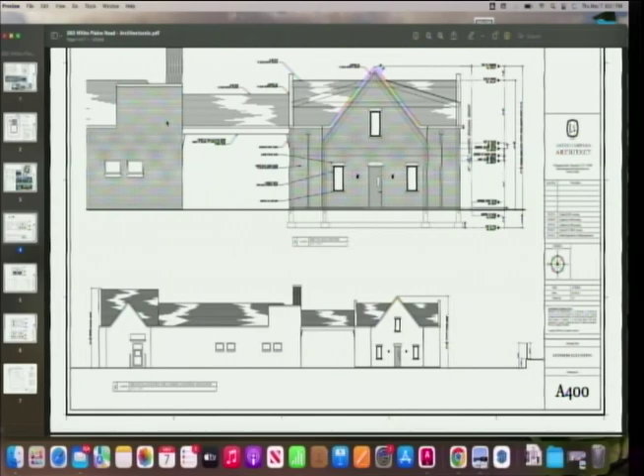I think when everything's painted white, you're gonna have some, I just mean the windows, I think it's gonna need some sort of signage on there. In order to get to the top floor, people are gonna need some sort of directional signage.

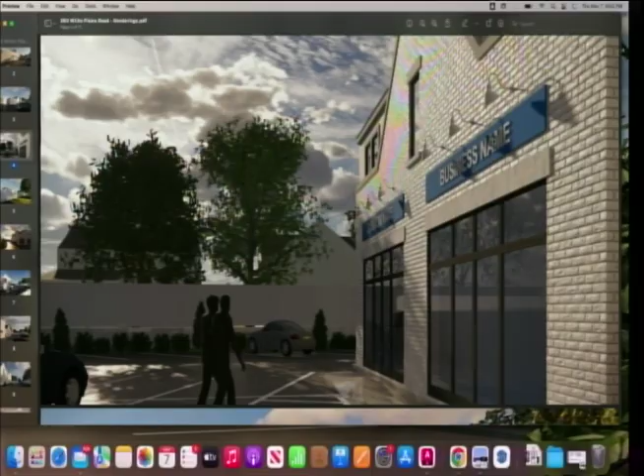Right? I mean, they can't go in the front doors, although inside the building they'll have signage office 2A and 2B. But how are they gonna know how to enter? If I arrive, I park, how do I know that's how I enter, that metal door, second floor? Unless you've been there once before, walking to the front of the building or one of the stores, they're gonna say, go to the back door that doesn't have anything on it. That doesn't make sense.

Yeah, I think there's gotta be some directional sort of intent, a little plaque, maybe where you park, saying which way to go. I think these are minor details, but personally speaking, I think the simplicity of this gable, I like it. This actually does a better job of telling that story.

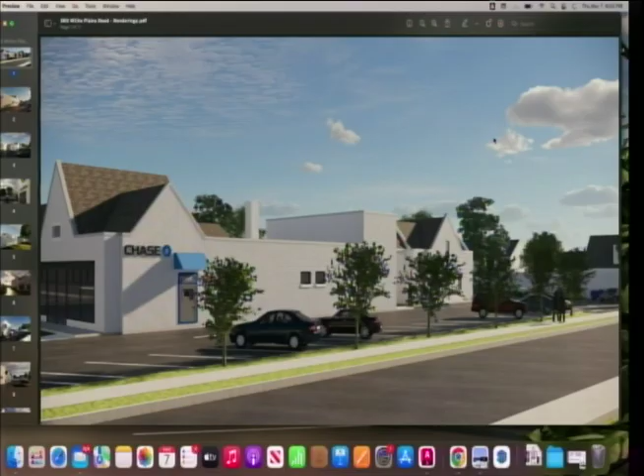Okay, all righty. So I'd like to make a motion to open application 23-27 for a public hearing. Second? All in favor? Aye. So obviously there's nobody here to comment because there's nobody here. Everybody's gone home.

There has been no main suggestions to keep this here at this board at this point. We close the public hearing. All I've heard was to coordinate the windows on the floor plan and the elevation, and to correct the direction on the elevation. We didn't go through the landscape plan.

Did you get that? I didn't see it. What page is that? Is it a resident or landscape architect? Is it separate? No, it's in that set of drawings. L1 - no, that's a survey. Is it in the set? Yes. The rendering and... not on there, they're usually in the back. Sheet one. Here we go.

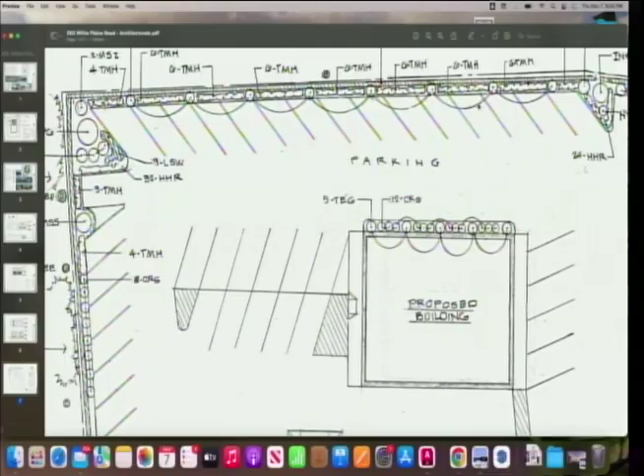On the east side of the building, up along the foundation, there's going to be a mixture of arborvitae and pink summer sweet. Along the eastern retaining wall, we have again arborvitae and Hicks yew taxus, set along as you can see here. We would have the arborvitae after every six taxus, just to soften that wall.

On the southern peninsula, located towards Cypress, we'll have the endless summer hydrangea in the corner, just a pop of color, Nellie Stevens holly in the center. We'll also have catmint which would run along the base, right in front of the holly, and then a yellow daylily which would run the perimeter of the peninsula. They were selected purposely because of their resistance to salt during those winter months.

On the northern peninsula, towards the back corner, which you also saw in the rendering, we'll have blue spruce at the center sort of anchoring it, with endless summer hydrangea right in front of it. We have zebra grass at the back corner here, Shasta daisy at the base, and again yellow dwarf daylily, a cluster of them in that island as well.

Along the northern property line, we'll have porcupine grass and pink summer sweet in a mix, with existing greenery as a backdrop, mainly on the neighboring property. And we have taxus on both sides of the peninsula, a taxus hedge on both sides, just completing that corner. And that's it.

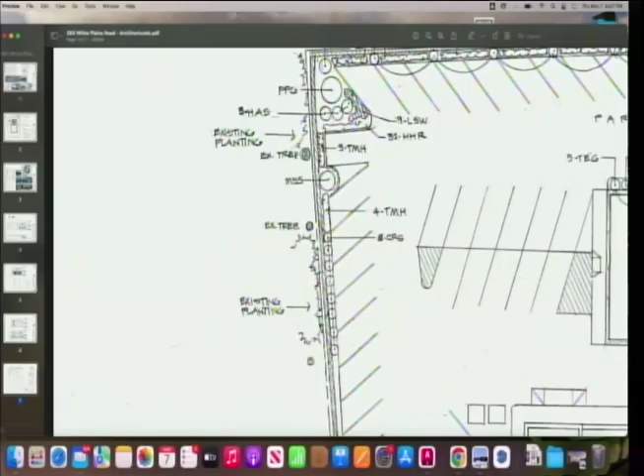Any comments or questions? Nope. All righty. So, back to our motions.

I'd like to make a motion to close the public hearing for application 23-27, unless I did that already. No. Okay. And then I'd also like to make a motion to refer application 23-27 for the address 360 White Plains Road to the planning board as submitted, with just the conditions to coordinate the windows on the floor plan and elevation and to correct the direction on the elevation.

Thank you. Thank you for your time. Very nice. Good luck. Second that? Second. All in favor? Aye. Aye. All righty. And I'd like to make a motion to close the meeting.